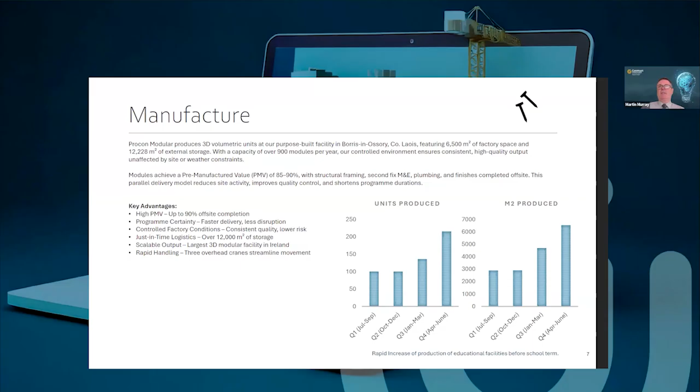While all that's going on, we obviously have site enabling and completion works carrying on at the same time. So we look after 100% of turnkey design and build projects, combining off-site manufacturing with coordinated on-site civil works to reduce overall project duration by 50%. This is achieved through a structured delivery model involving dedicated internal resources and experienced subcontractor teams.

So there's off-site and on-site work streams: the civil works are undertaken in tandem with the off-site modular manufacturing process. This parallel sequence shortens overall programme duration. We have dedicated civil teams nationwide who are all pre-qualified subcontractors. These teams are aligned to the Procon project schedules and standards.

In-house site oversight. Procon deploys dedicated site managers to oversee all site activity. These individuals coordinate the civil works, module installation, and post-installation works, ensuring consistent quality and programme adherence.

And then the consultant engineering support: we engage specialist consulting engineers across all required disciplines, including structural, M&E, fire safety, and DAC. These consultants ensure all works are executed in compliance with BCAR, NZEB, Part L, building regulations, local authority requirements, and utility standards. All site enabling and completion works are delivered under strict health and safety protocols and in accordance with our ISO certified quality management system.

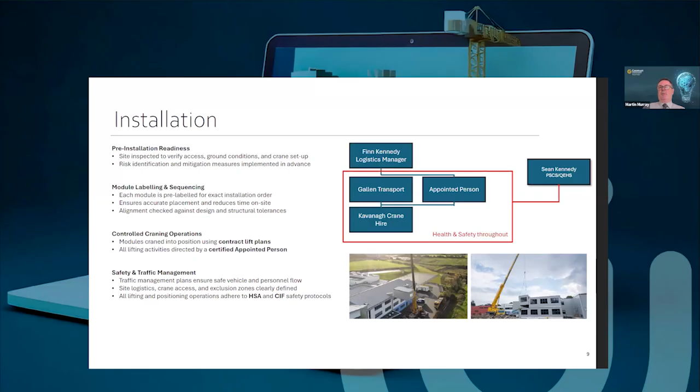Controlled craning operations. Modules are craned into position using contract lift plans. All lifting activities are directed by a certified appointed person. Our safety and traffic management plans ensure safe vehicle and personnel flow, with site logistics, crane access and exclusion zones clearly identified. All lifting and positioning operations adhere, most importantly, to HSA and CIF protocols.

Completions. The completion phase includes the installation and commissioning of all internal systems and finishes. This covers M&E, plumbing connections, floor finishes, internal joinery, and final fit-out works. Each element is completed in a controlled sequence to maintain programme flow and ensure compliance with design, specification, and regulations.

Throughout this phase, a structured quality control process with ongoing inspections, system checks, and trade-specific snag reviews is carried out to identify and address any defects prior to handover. This progressive snagging approach reduces rework and prevents backlog at end of project. Our final inspections are completed in line with BCAR, ensuring all documents are in place. The result is a streamlined handover process, with Procon consistently achieving 95% snag-free delivery at practical completion.

Project handover and closeout with programme delivery. Handover planning begins early to ensure programme alignment. All works are completed in line with the master construction programme. Our quality control and snagging starts at project inception, not just the final phase. Trade-specific inspections at every key stage: manufacture, installation, final fit-out. A digital QA tool supports structured tracking and resolution. Proven track record of 95% plus snag-free practical completion.

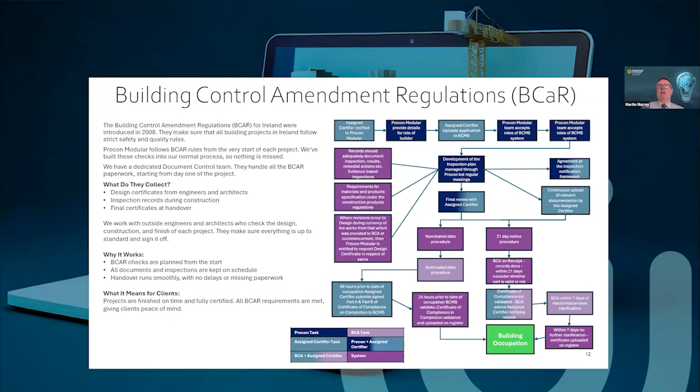Then we have obviously BCAR, which is very detailed. In this particular instance, I won't go through all this, but why do we collect, why it works, and what it means for the clients. Most important is that they're getting a quality building that adheres to all building control, which is the most important part.

Capacity: we obviously have the main factory, which is down in Borris-in-Ossory, County Laois, which is where our main facility is. 6,500 manufacturing floor space with 12,250 storage and set down area outside. Dedicated access roadway for transport and logistics, on-site offices, canteen and welfare facilities. Operational heights, the primary site for 3D volumetric production, equipped with our overhead cranes and advanced logistic setups. Central hub for large-scale projects nationwide.

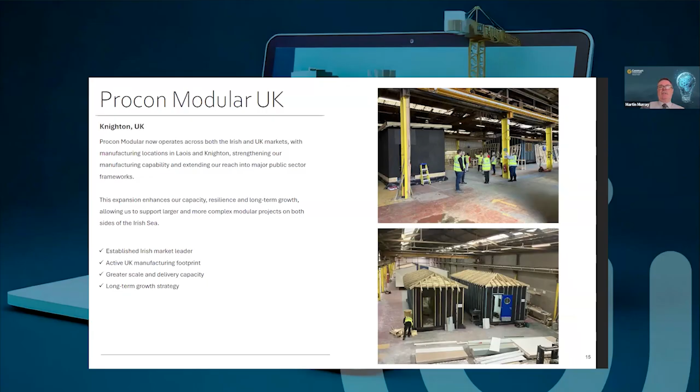So why Procon? The big thing, agrément certification, which is coming down with government very quickly now. Presently, we have the BDA agrément certification from Kiwa in the UK, which we received earlier in January 25. This conforms with all compliance with Irish building regulations, EN and UK for all our modular system. We're also finalising our agrément cert with Kiwa Netherlands, which we did receive earlier this year, and that confirms specifically with Irish and EU standards.

To accelerate certification, Procon has followed a parallel track, starting with Kiwa UK and then Kiwa Netherlands to cover both Irish and European. But also in that process, we're still going down the road with the NSAI agrément certification, which we're getting very close to, and we've been intimated that we should have by the end of March, middle of April. All the paperwork is with NSAI at this stage, so we're nearly there.

Obviously, we have 9001, 14001, 45001 and 19650, which are all key categories now. And we're obviously with CIF, NISO, CAOB, newly formed SOSA and MMC Ireland.

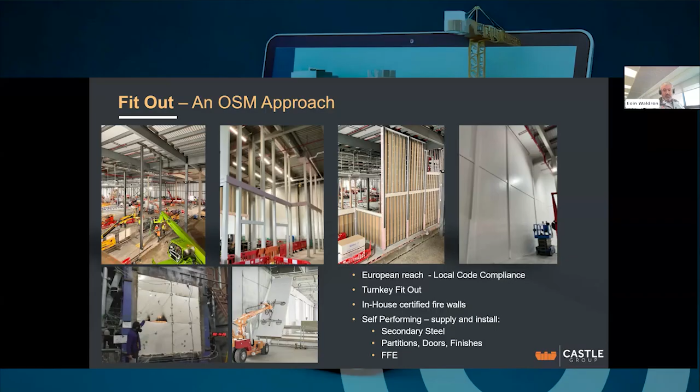So in the fit out side, we do full turnkey from the images that you saw a second ago, which was the raw early stuff on site, right through to the final finishes, loose furniture, carpets, floors, glazed partitions, etc. And some of our projects there, including IDA, head office fit out, that type of stuff. So over to the modular then. So this is some of the residential projects we did. This was one for the OPW.

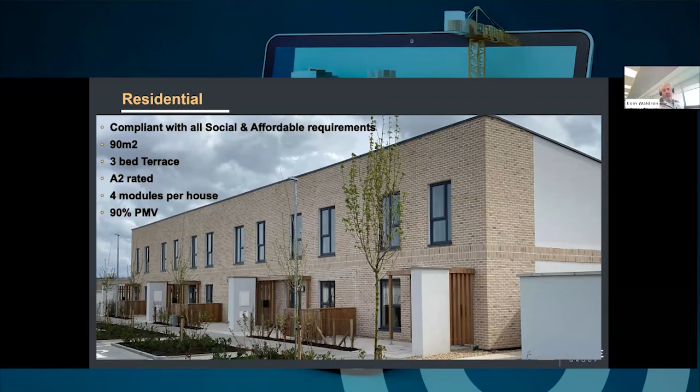So these were fully modular homes. There's a terrace of 6 houses made up of 24 modules. Each one was 90 square meters. They were 3-bed terrace, A2 rated, and 4 modules per house. So they left the factory with a PMV of 90 to 95%. So the kitchens were installed, timber floors installed, all the render, brick slip, everything was complete prior to them leaving the factory. And as you can see, it looks like a traditional built home.

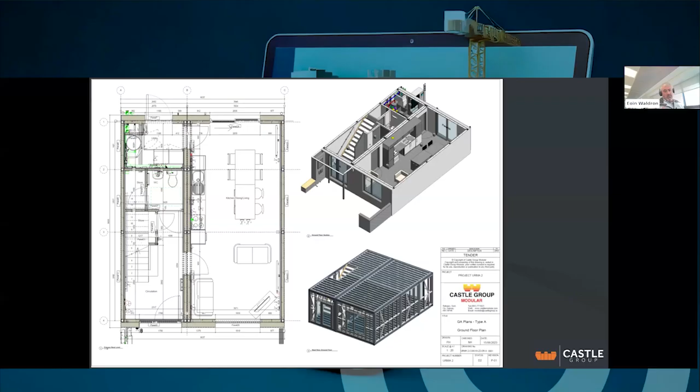So these were a fully light gauge structure that we used. We had no hot rolled steel in these, which made for a more accurate installation during the installation phase. In fact, it was a terrace, and all the finishes were pre-finished. So we find we can get a lot more tolerance accuracy with the pure light gauge assemblies. So of course we roll our own metal on site. All our 3D model is done in the factory, and that moves through to our Howick machine. We roll all our own metal, and then everything is built up from scratch.

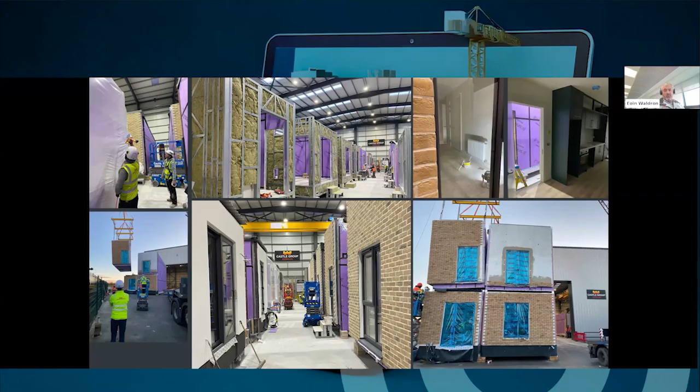These are the general layouts. Here you can see some images from our factory. The top picture in the middle there, where all the modules are laid out. Unlike some factories, we move the tradespeople rather than moving the product. Some factories you'll see have rails, but because our order book is so diversified, it doesn't work for us to have rails in the factory. So as you can see here, brick slip, render, everything finished in the factory. The bottom right is a trial assembly that we did in the factory prior to delivery. And the top right, you can see where we have the kitchens installed, timber floors installed prior to delivery.

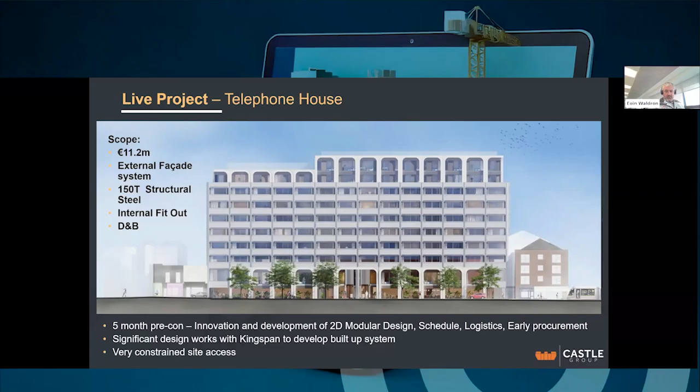The next project, again, was a pivot to an external facade system that we carried out, again, as a result of a request from a client on a tricky project they have had. Project is just nearing completion. So on it, we did the external facade system plus the internal fit out, plus 150 ton of structural steel. So it's the old telephone exchange just off O'Connell Street in Dublin. So very constrained city centre site. There was about 100 square meters of set down area on the project.

So all of these panels that we can see here were manufactured in the factory. So glazing was installed, the LGS build up in the back, structural build up in the back, and then the brick slip, which is the kind of sandy color, and were all completed in the factory prior to delivery.

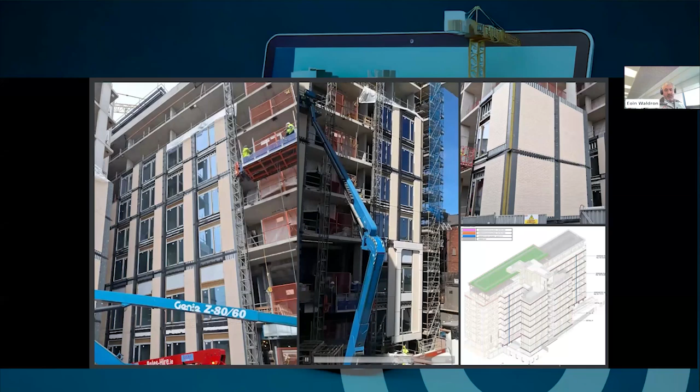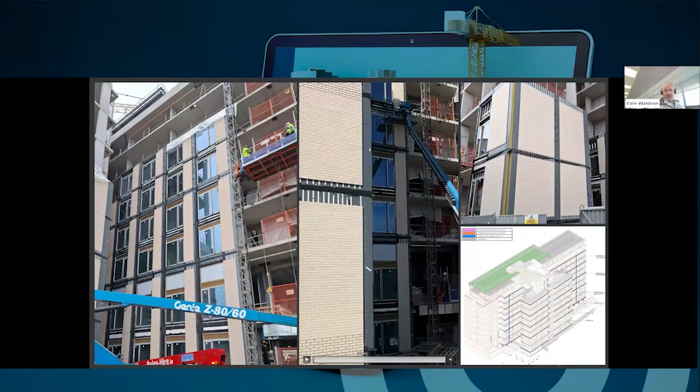So there were 9 stories in total. We used a Kingspan K-Rock panel, and then all of the various different finishes were installed at the factory prior to delivery. Then to finish it out, and to cover all the joints from panel to panel, we used this, again, Kingspan system, which was site applied.

So it meant we didn't have big, massive laydown areas on the project, and we were able to access those just through cherry pickers and boom lifts, rather than having a full scaffold, which wasn't possible due to the access constraints. So as you can see, it turned out quite a nice finish, and we still have a minor number of guys left on site there. But again, it's that diversification on the portfolio where we've gone from residential to a hospitality project.

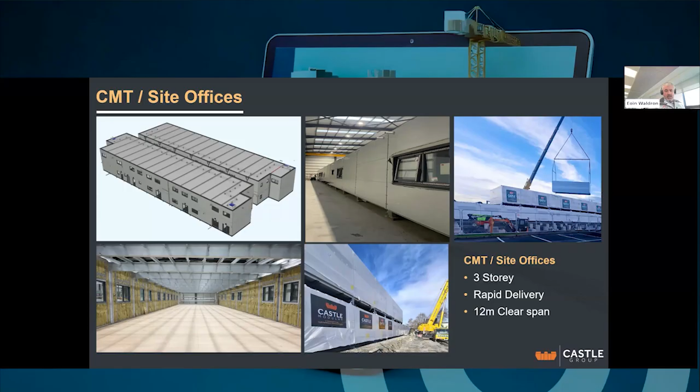This is a current live project we have in Athlone on a pharmaceutical factory, which is probably the more traditional approach to modular construction, quite similar in the structure and the layout to the schools projects and the schools framework that a lot of other companies are on. So very similar light gauge steel system with a hot rolled corner post, cladding panels, and then the internal fit out. Again, we try and maximize the PMV similar to Procon, but it just depends on the layouts and how much of that we can do off-site. So again, three story option on that.

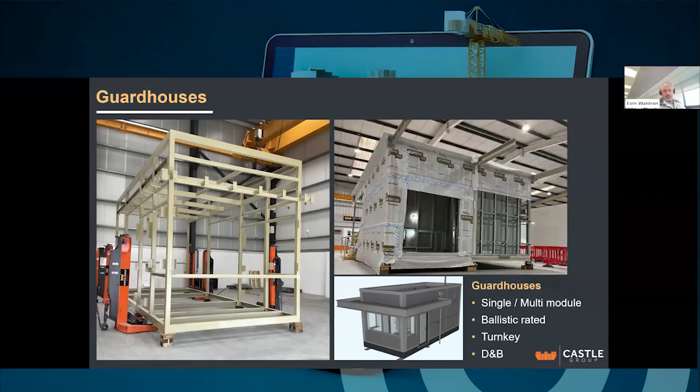The next is one that's growing. They're tricky little projects, which are guardhouses. We tend to do a lot of these for export, for pharmaceutical, and for data center clients. So the one on the top right is a 2-module project, which is going to a pharma factory in Dublin, and the other ones were for export to Eastern Europe. So these are, I'll just play this video here.

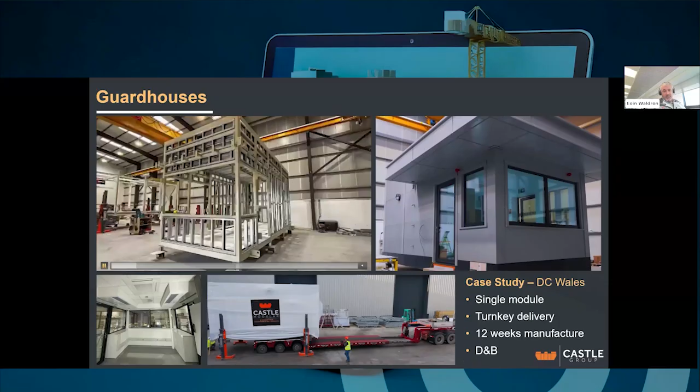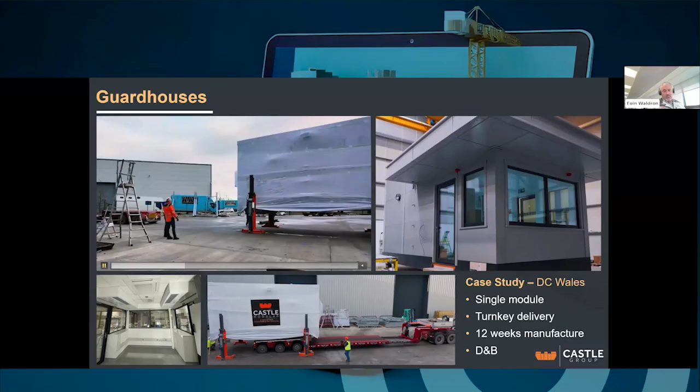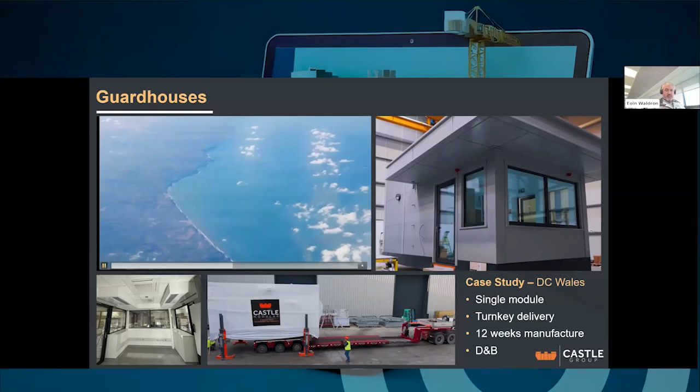These are very heavily serviced. They tend to run all the security for the facility, whether it's a data center or a pharma factory, through these. So they could have 150 separate comms cables coming into each one of these. So there's quite large communications panels. Some of them have ballistic rating. We have one in design currently, which has a PB6 or BR6 rating on the glazing. It has ballistic panels in the walls as well. So it's fully rated to be able to take bullets at a direct shot or at a 45-degree angle.

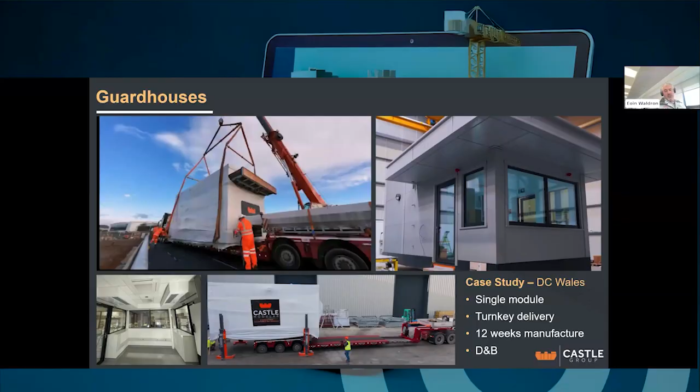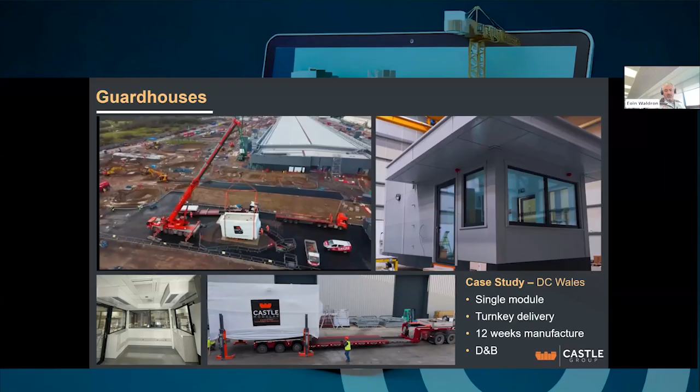So again, quite complex, quite heavy when you add on all the Kevlar panels, you add on the extra 4 layers of glazing, etc. So tricky little projects, but they are longer in design typically than they are in manufacture. So you're looking at probably 12 weeks in manufacture, and you're looking at 16 to 20 weeks probably in design, depending on how engaged the client's team are.

So again, that's another few different examples of those guardhouses that we do. So they don't take up much space on the factory floor, but they are very heavy on prelims, as I said. So again, one clad in timber, one with a big cantilever canopy on it, and this one being a split 2-module one, which has a little IDF or comms room at the back of it. It has a storeroom, and the disabled access WC, kitchenette, and then space for 2 security guards.

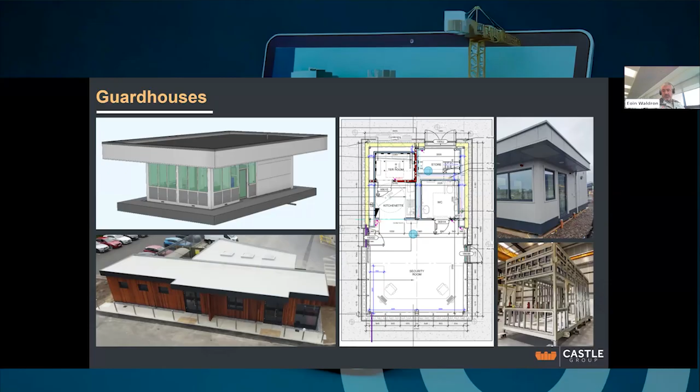This next one, these are meet me rooms, or telecom rooms. Again, these are typical of a lot of what we do for pharmaceutical factories in particular. So on some projects, we would supply up to 15 or 20 of these to one project, and other projects we would supply 2 or 3 of them, it just depends on the project.

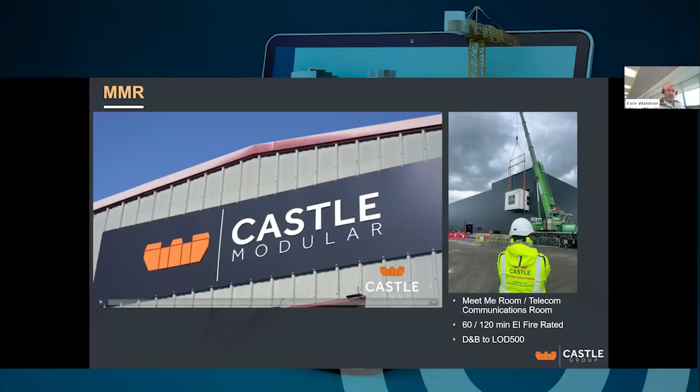Some of them come with quite a tricky install. As you can see in the picture there, where there was a soft spot left out in the building, and the module had to be dropped in and lowered in and winched in internally while it was hung on the crane. So there's a lot of pre-planning, a lot of accreditation, a lot of sign-off, lift plans, all the good stuff that goes with that, and a lot of, I suppose, complicated equipment.

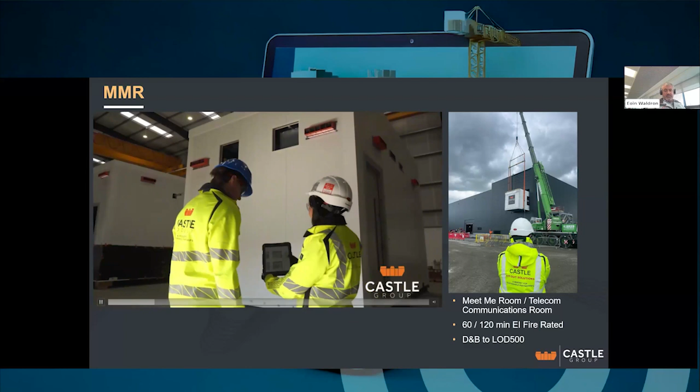So what's in these rooms is basically they're 1-hour rated rooms. They have typically data racks, servers that run all the equipment.

I hope the sound isn't coming through there.

That run all the equipment within the production facility. So as you can see, as our team are walking through there doing the QC inspections, we have 4 rack or 8 rack options on it. 1-hour rated, 2-hour rated, and they come with all the required cooling, all the required security requirements, clean earths, dirty earths, all that's required from the facility.

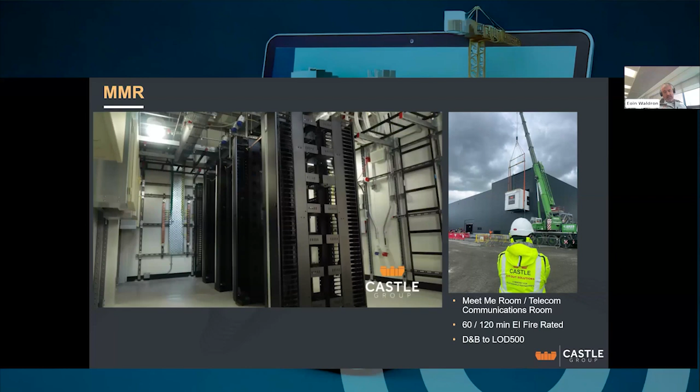So these are typically inspected in the factory. They leave the factory punch free. We won't be accepted at site, and we won't get the permits to ship them to site unless everything is punch free.

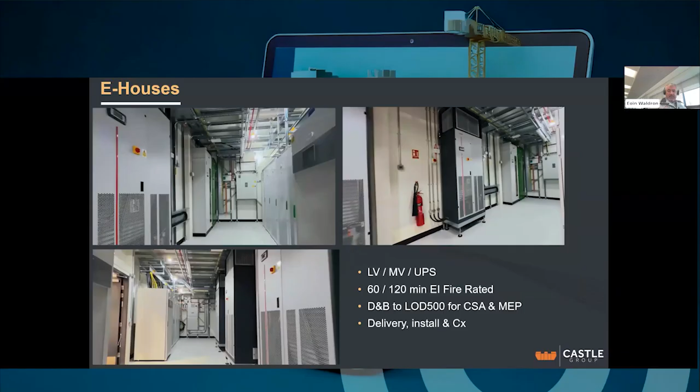So then another level up in terms of complexity, we have what we call e-houses. These are similar to the TER rooms, except they typically have LV panels or UPS panels included in them. So we will take the design of these from, I suppose, 10 or 15% design completion from the client, where they'll show the overall basic layout, overall basic intent. We then will size all the cooling, size all the racks, size the UPS system, coordinate all the services, and again, then manufacture them and deliver them to the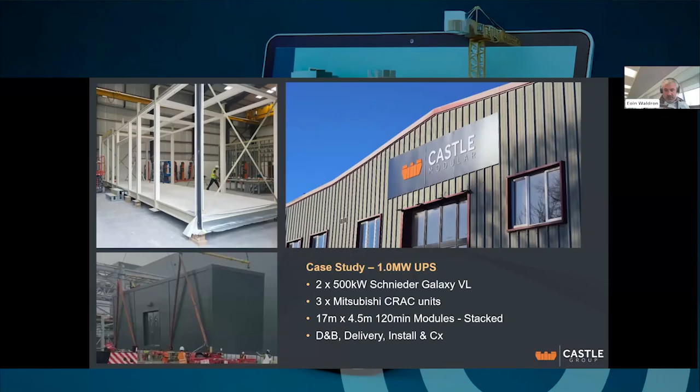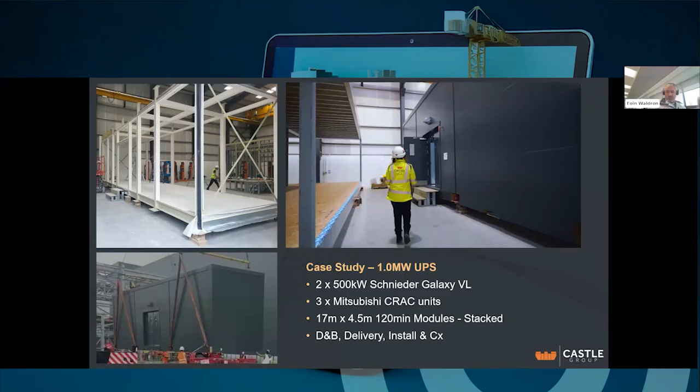factories. So these ones would weigh over 40 ton. This one that's in the video here was 42 ton, full hot roll structural steel frame, UPS batteries. It had 2 500 kilowatt Schneider UPS systems, 3 CRAC units. So very, very heavily serviced. And again, very, very different from what we do on the residential side or on the 2D panel side.

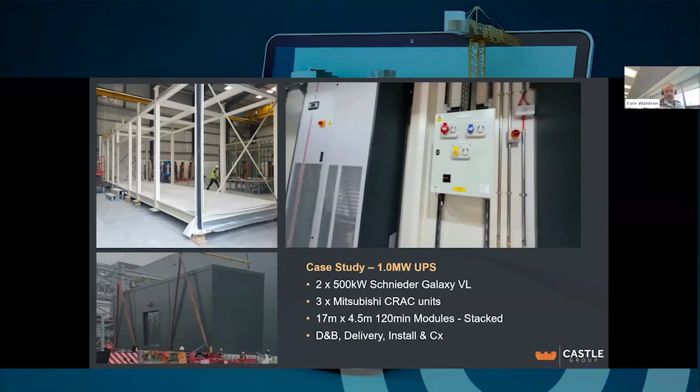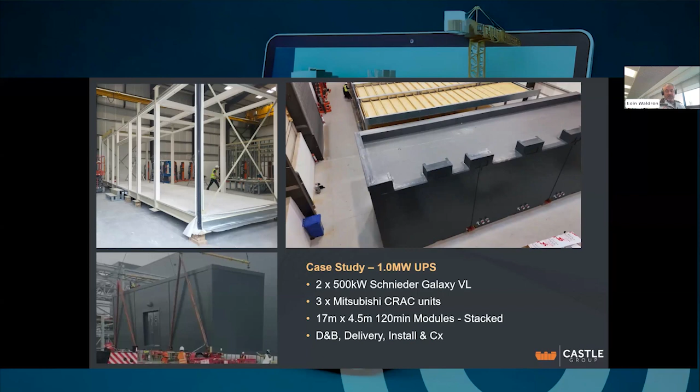So the challenge for us, because we're not in the big schools framework, is keeping our factory floor full through diversification and through, I suppose, using our fit-out company to get in first on a project, or our modular company to get in first on a project, and then growing our scope within that project once we get in, by adding in basically the modular options, the admin options, etc.

So again, this is an overall plan view of that module, where we have on the right hand side the fire suppression, which is a pre-action sprinkler system. Obviously, we can't have any water in the room while there's batteries in it. We then have the battery racks. We have the 2 UPS systems and a rack of batteries again, security panels, the UPS backed distribution boards, or the emergency backup generator backed UPS systems, and then we have the CRAC units.

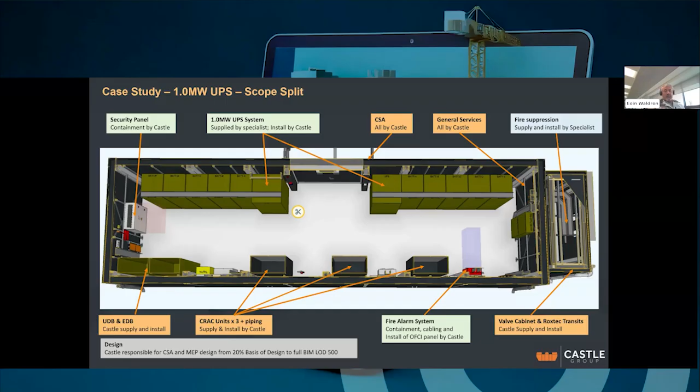So I suppose what we're trying to show here is the level of diversification that it can take for some modular manufacturers in order to keep the lights on in the factory, to keep the business turnover targets met, and to really give that other level of service to our clients. So what we're very conscious of as a manufacturer in Ireland is that you either go down the big framework route where you're producing high volume repetitive stuff, or you go down the diversification, more specialist route.

At the minute, we're kind of dancing between both, and hopefully now the Agrément cert will get us a bit more of a steady pipeline on the residential side of things, while we maintain the more higher spec, complicated e-houses and TER or UPS rooms. So I suppose that's it from our side. If anybody has any questions on how we manage the diversification, I'm open to those.

Of course, it goes without saying, we have all our ISO accreditation, our EN 1090 accreditation, and now have our Agrément certification. We have our own in-house design team. Of course, health and safety to the fore, quality to the fore. All of that is a given for us, but very much a diversified portfolio is what's in front of us, and it suits us because it worked well with our fit-out division also, while that may not suit other businesses.

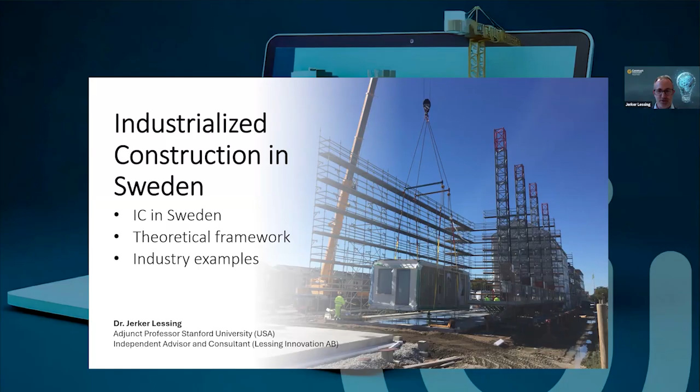And with my presentation, I think we'll take maybe two steps back and try to see almost the whole country. We'll have a look at how industrialized construction, as we call it here in Sweden, has developed, how it has evolved, and also look into some theoretical framework. I share my time, as Jamie said, between industry and academia, so we'll have some theory in here as well, and then a couple of industry examples to see what it looked like.

A couple of words about me, why I'm talking about this. I've been working with industrialized construction for more than 20 years in various positions. I have shared my time between industry and academia. I did my PhD here at Lund University in Sweden on the topic of industrialized construction. I did my first part in 2006 and the last part in 2015. That also led me to a collaboration with Stanford University in California, and I still have a role there as adjunct professor, as Jamie mentioned.

I spent 8 years between 2015 and 2023 as head of research and development at BoKlok, which is a joint venture between the large construction company Skanska and the giant home furniture company IKEA. At that company, we really applied industrialized construction methods and built affordable homes for, so to say, the many people. We built around 15,000 homes over a 25-year period. So that's roughly who I am, with a long history of working within this field.

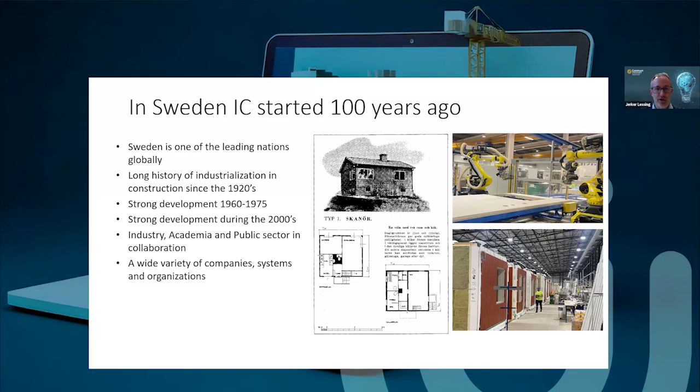There was a strong focus on development in our industry, actually sparked by some really severe quality issues, and both industry and academia responded to the criticism. A couple of industry, academia, and public sector collaborations or R&D innovation programs were launched to deal with the challenges in the industry, and that was the spark for the contemporary development of industrialized construction. So all this has led to us now having in Sweden a wide variety of companies, systems, and organizations working according to industrialized construction principles. And we will soon have a little peek into what that means.

But what have we learned over these years? Well, we have learned that industrialization is not only about production. It's not only about moving activities from the site into a factory, but we also need a holistic and integrated approach to what we're doing, because we are changing what we are doing and especially how we are doing things. That leads to a need for changed business models and changed strategies. At least the traditional construction company model has to change if we are to make changes in both the product and the process and so on.

What we also learned is that it takes time to get it right. There are no quick fixes. It takes time, patience, and a long-term perspective. It was also very clear, not least from my experience from BoKlok, which was a very customer-centric company, I think a legacy from IKEA, that really having a customer-centric approach to what we do is crucial. And if we do that in the right way, then it can be very, very powerful.

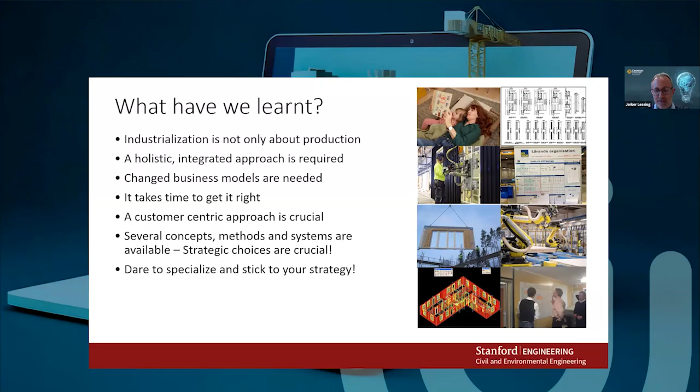And the last point here is that it's important, or it's actually rewarding, to dare to specialize and then stick to the strategy, and then the benefits and the rewards will come. So those are some of the learnings that we have made around here.

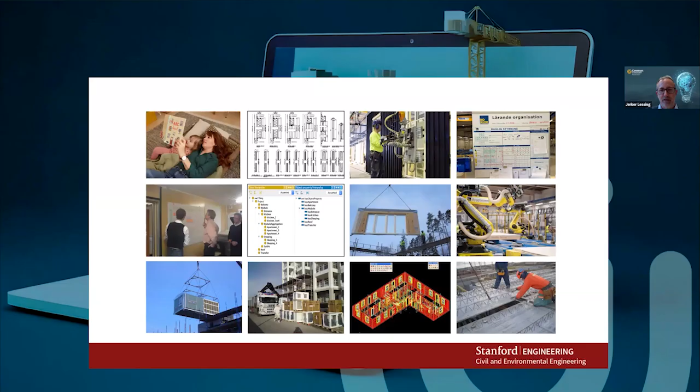So, but maybe back to what we mean with industrialized construction. Well, we mean actually all this. It is a variety of different aspects that need to be considered. But if you look at these different boxes, you see factory production, you see prefabrication, automation, use of digital tools, logistics, building systems, long-term relations, standardizing processes, customer focus, planning, and so on. Nothing new. That's something we do always in the industry.

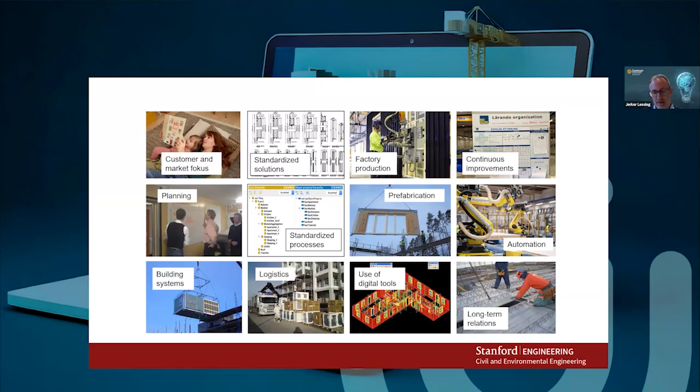But what's, so to say, new here, or at least crucial, is that we integrate these different aspects with each other and strengthen it to create product and production systems out of this. And that's what I mean with specialization. So we have to pick a piece of the market, focus on that, and then create long-term oriented concepts or products or platforms, or whatever we want to call it, and also production systems. That's when we start to look like manufacturing industries.

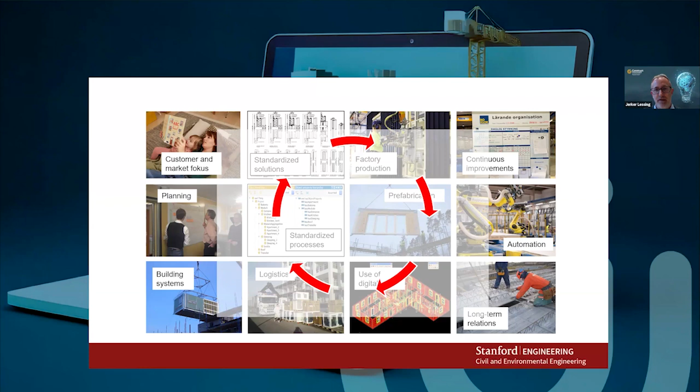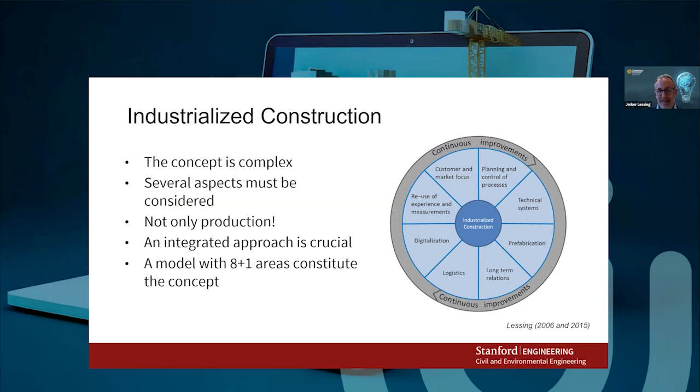In my research, I put this together into a theoretical framework, saying basically that the concept is complex, several aspects must be considered. It's not only production, but it's an integrated approach and a holistic approach. And this model here, the blue and gray model, shows that it's about these 8 different fields that are tied together by continuous improvements. And that's when we get this to work as an industrialized construction system.

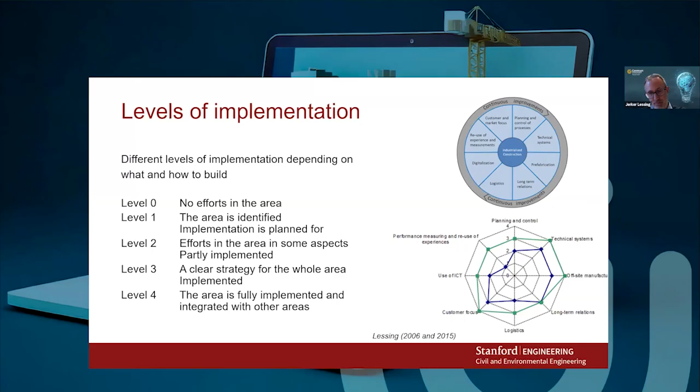There's not one way to do this, and this slide shows that for each of these 8 areas, we can actually be from a level 0, maybe rather not be on level 0, but you can range from a level 1 to a level 4 in all these different sub areas, and that can tailor the concept that is suitable for you and your company or your concept on the market, and that creates sort of a unique setup and a unique way to treat planning and prefabrication and long-term relations and logistics and so on.

And also, when it is about industrialization, it's smart to look at other industries that have much more experience in this. That's at least what I did in my research, and found then that many other industries work with product platforms, and that's a super powerful structure. So it's about structuring our technical solutions and processes in platforms, and that creates a backbone in the company. And it clarifies our product limitations. We can develop solutions to a much higher degree and be much more prepared to execute our projects.

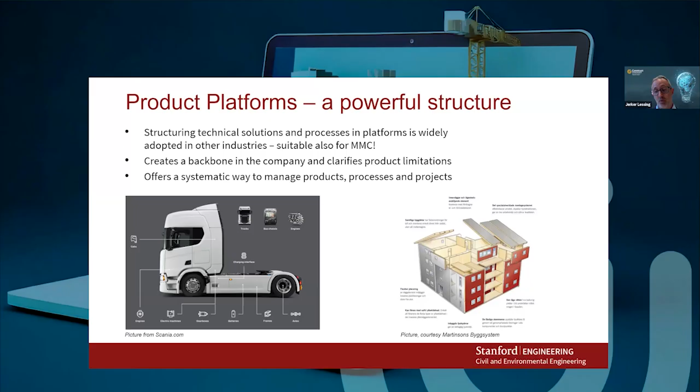And this offers a systematic way to manage our products and our processes and ultimately our projects when we execute and deliver to our customers. So, of course, we do not build houses or buildings as trucks or cars or ships, but there are some principles and methods that we can get some inspiration from, and that can be very powerful. And again, there's not one way to do this.

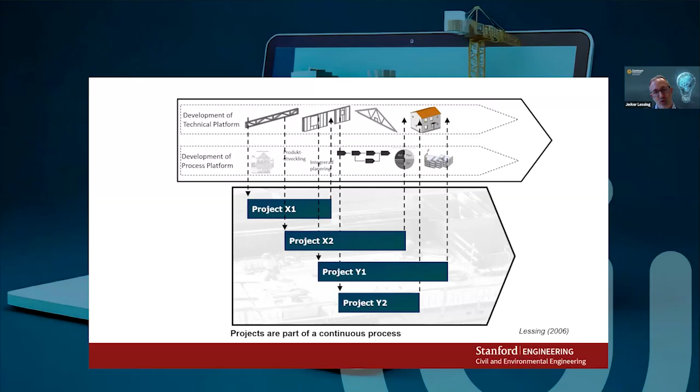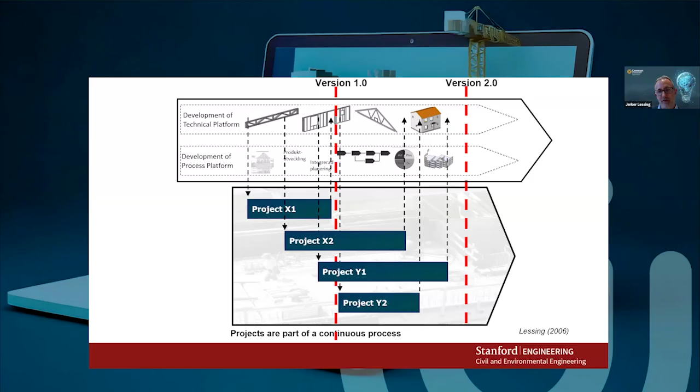And the projects coming further down the line, they benefit from the learnings and developments that have been done before. Then we can also start using some structure in time to launch new versions with similarities to other industries, like yearly models or new versions or whatever we want to call it. So that's sort of an end of theory lesson.

So how does it look like in Sweden then? Well, I would say, in the contemporary development, we have had 3 tracks in our development. One that we can call the complete concept offers for multifamily housing. These are offered by vertically integrated companies. It's complete housing concepts. They are typically in the lower end of this blue matrix that I showed. So mature and fairly advanced industrialized construction companies.

We have also a track that we can call project-oriented concepts. So these are projects built with open building systems, typically a pretty high level of prefabrication, but open building systems. You combine different subsystems into a unique project. So that creates a wide variety of project types. These are typically in the upper levels of the blue matrix. So fairly low level of predefined solutions, but still some level of building system use.

And then we have the single family homes part of the market. Those are similar to product offerings. As I mentioned before, we have a long history, very high market share. In Sweden, we have around 80% market share for industrialized construction-based single-family homes. And since we serve the whole market, we have a wide variety of offerings, from very standardized to very bespoke. So we'll have a look at that very soon.

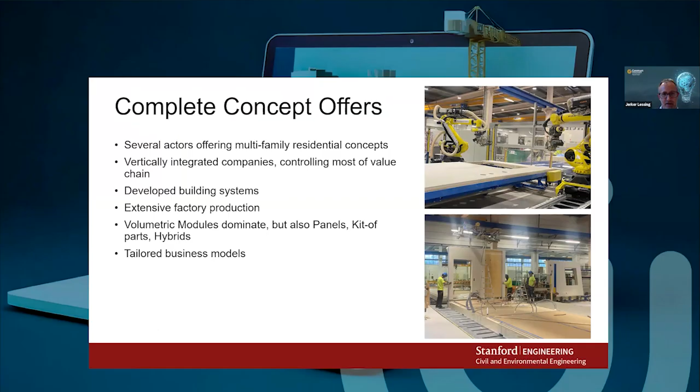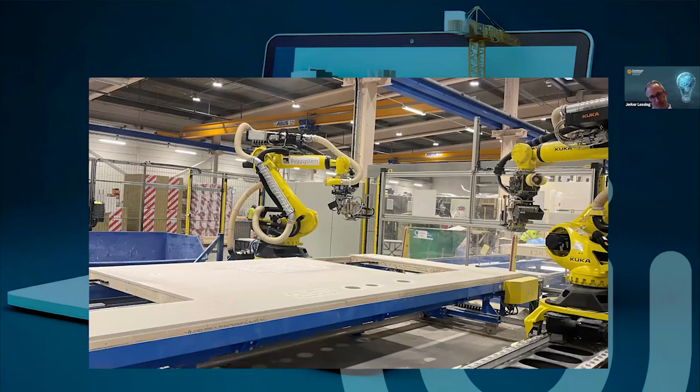So the complete concept offers are offered by vertically integrated companies focusing on multi-family residential concepts or buildings. Extensive factory production, so typically built as volumetric modules, but also panels or kit of parts exist, and we have tailored business models for this. This is how it can look like, as you have seen many times, of course. Some companies have invested a lot in automation, but it's not actually necessary to be successful, but this is how it can look like. So around 80-90% of the construction work is done in the factory.

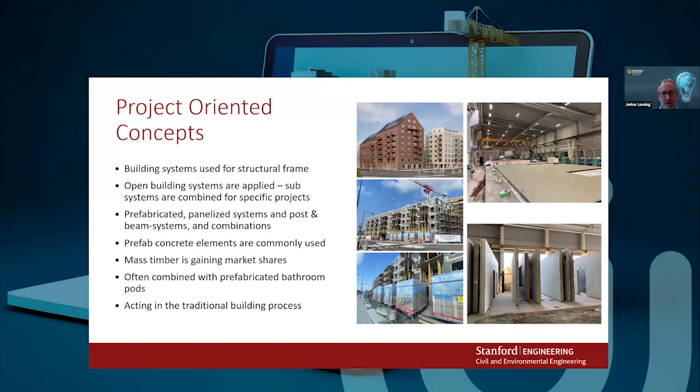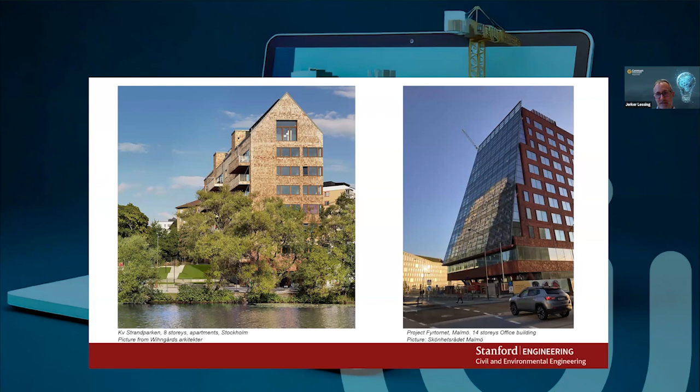And then we have the more project-oriented concepts, as I said. Then building systems are used for typically the structural frame and the facade and the roof. It's also common to combine with prefabricated bathroom pods. Mass timber is gaining market shares, but prefab concrete is very commonly used. And then it can look like this. I mean, typically bespoke, unique, nice buildings. The building to the right is actually a mass timber-based office building in my hometown here in Malmö, in the south of Sweden. 14 stories office building based on an open building system. Very, very nice and architecturally awarded building as well.

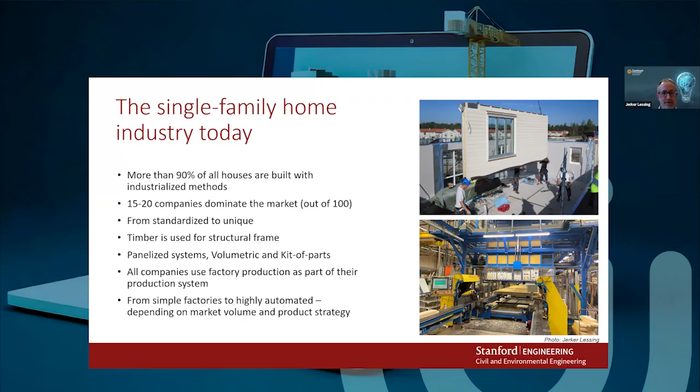And as I mentioned, the single-family homes industry, around 80-90% of all houses are built with industrialized methods. We have maybe 15 to 20 companies that dominate the market, but in total, maybe 100 companies that are active with these methods. Timber is used for the structural frame mainly, and the dominating system is panelized system. So typically they build the walls and the floor elements in the factory, and the rest is complemented on site. And this is how it can look like.

So just a summary of how it looks like in Sweden today. Around 80-90% of market share for single-family housing, around 20% market share for the advanced complete concept offers. Prefabrication is extensively used in not all, but maybe 70% of all projects. We have some 15 producers of advanced building systems, 4 cross-laminated timber factories, maybe 10-15 producers of precast concrete elements, and as I mentioned, 15-20 single-family house companies that dominate, but there are many more, and a lot of investments and a lot of development going on in this. And actually, we get a lot of international interest for what we do here.

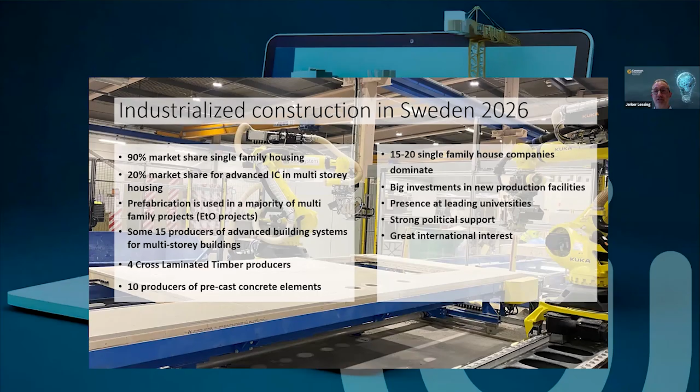So just to end, I was thinking a little, okay, so what could Ireland learn from Sweden? And here I'm maybe on thin ice because I'm not completely sure what level you are on today. But I think one thing that has been very successful for Sweden is that we have had some

triple helix programs, and triple helix meaning that industry, academia, and the public sector collaborate to advance some piece of the industry together in R&D or innovation programs. Doesn't have to be billions. We have had some fairly small programs that actually came to act as the spark for some really, really strong industry development, and also some really great academic learnings.

Another thing is maybe don't make industrialization too complicated. I think what we saw in the previous presentations made me happy, because it doesn't have to be super complicated. It doesn't have to be billions in investments, but it takes some determination, takes some strategic decision, and sticking to the plan.

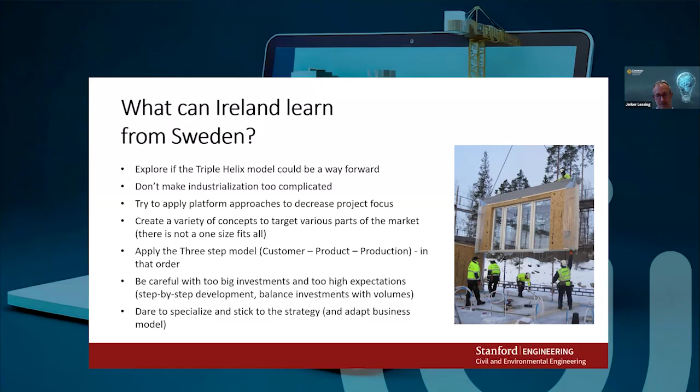And as I have mentioned a couple of times now, dare to specialize. Pick a piece of the market, focus on that, and do that super well, and then stick to that strategy. And of course, adapt the strategy and business model to that. Then it can be very, very powerful and successful and profitable as well. So that's actually what I have planned.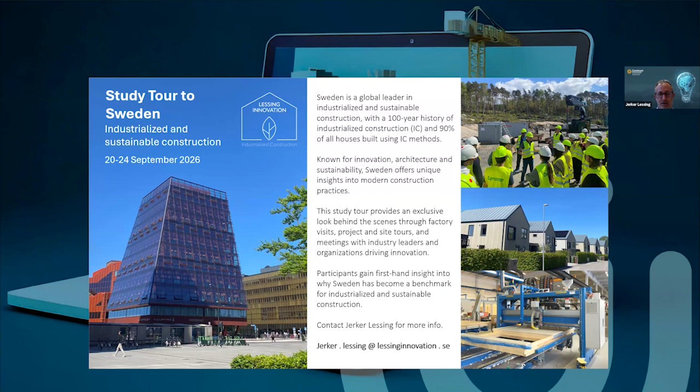Jerker, that's fantastic and great advice as well. And reflecting on the advice that you gave there, I think the two other presenters today must have listened to your advice a number of years ago, because I think they've followed it quite well. And to see that amount of industrialized construction that's happening in Sweden, in particular in the residential market, where the vast majority of single family dwellings are industrialized construction.

I think I mentioned about 90%. I don't know what the number is in Ireland, but we're getting there. I think the panelized timber frame is probably up on 50+% now at this stage. So when you add them all up, I'd say we're starting to get close to that 70-80%. I don't know the number offhand, but that's been a big change in the last 5 to 10 years. We went from very low to very high. So it shows how the market can penetrate quite quickly when you have really good companies set up for it.

So we're going to open up to Q&A with our three presenters. So we've got a few questions in there.